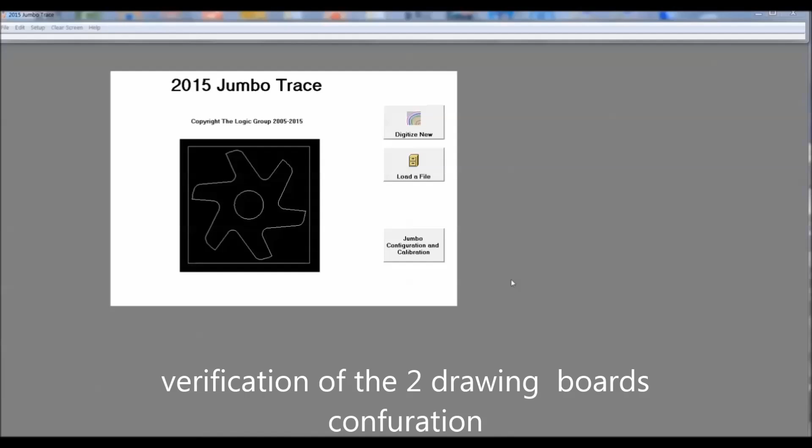Before I start any tracing, I like to verify that my two boards are working correctly with the computer. Go to Setup and Configure and follow the instructions. What you're going to end up doing here is touching the pen on table 1 and verifying that table works, and touching the pen on table 2 and verify that that table is working correctly. This also shows that the ports are working correctly. Now that everything checks out, you're ready to digitize.

I want to show the two reference points. They're the red X's on the diagram on the left, the red X on the diagram on the right. Before you draw, the program will ask you to input the two reference points, the one on the left and the one on the right. These reference points are important because that enables you to move the diagram and get the alignment. I'm just showing here the different selections that I use for drawing.

I draw each separate part and I complete it. As each part is completed, the software will close up that part so there's no open vectors. Again, I always talk about saving my work. I save my work frequently. In case I have a bit of a problem, I can always go back to the copy that was perfect.

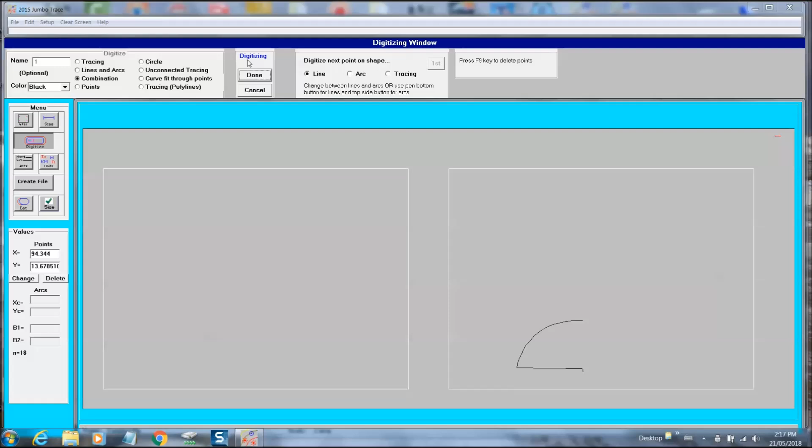I seem to use the combination selection a lot. It just feels comfortable. When I make up these videos, I also speed them up because it would take forever to show some of the drawing. I just take my time and do each section, close it up, make sure there's no open vectors. And again, save my work frequently.

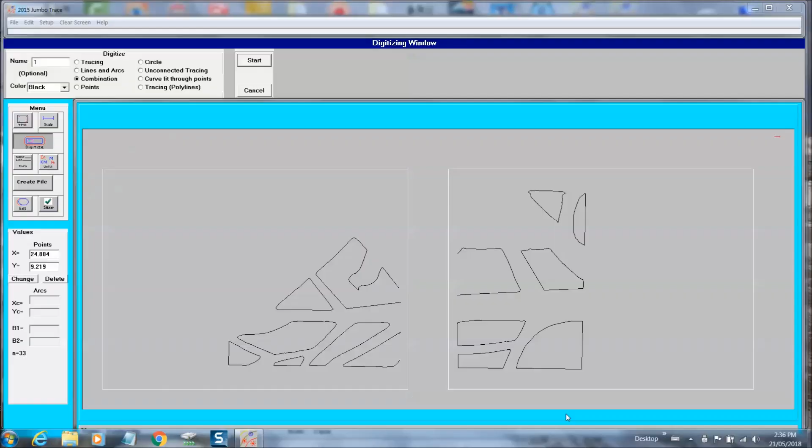So you'll notice here you can see that joint between the two boards where the drawing is not picking up. That's why we have to move the diagram using new reference points to be able to draw that area in that joint between the two boards. Again, that area that I've penciled off with the red marks, that's the joint area that I'm redrawing.

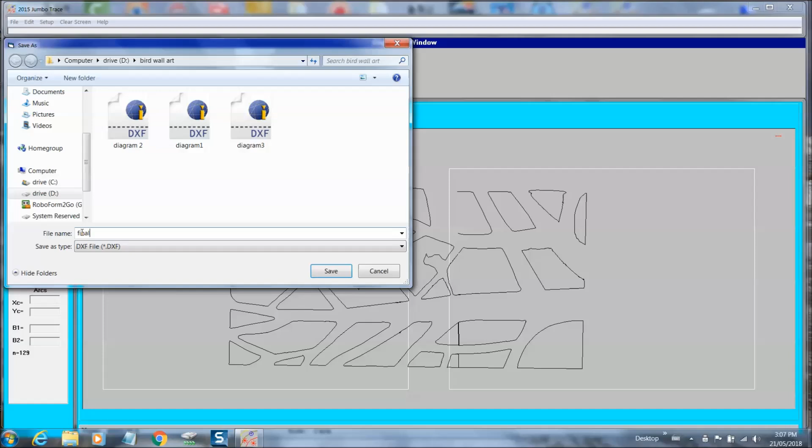After you move your diagram to the new reference spots, there's a procedure to follow to draw in this joint area. There may be some node editing required when you draw in that joint area, especially joining up the diagram. Now that we're complete, let's save the file as the final.

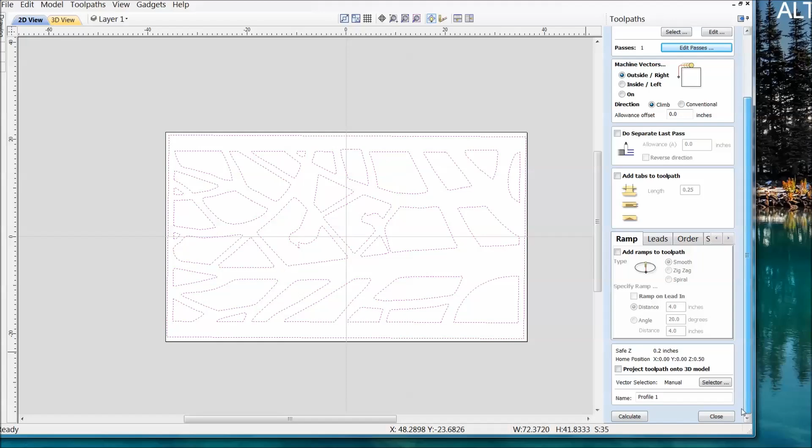I take the file that we created and I load it into Vectric Aspire 9.0. This program checks for open vectors, allows some node editing, and creates a toolpath. I also like to run it through the simulator to simulate how it's going to look, spin it around, orientate it the right way, even make it look like it's a piece of wood. The file looks good, it's ready to have a toolpath and ready to be cut.

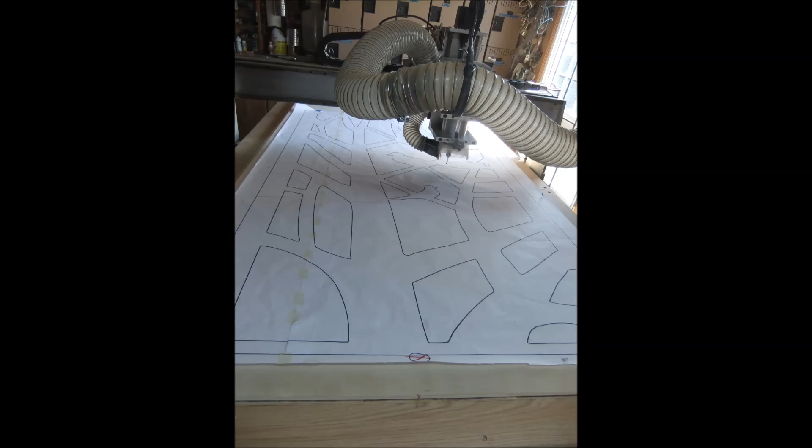I tried something different this time. I put the full-size plans on the 1/2-inch plywood that I'm cutting. This sort of enabled me to see how the cut would look on the sheet.

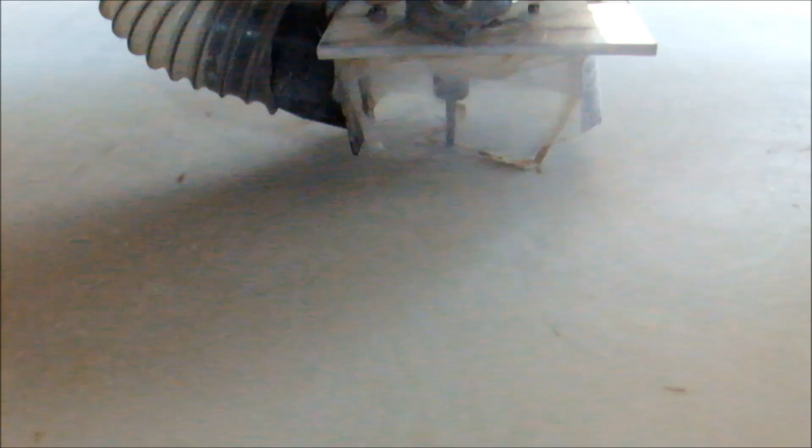I'm using a 1/4-inch end mill, about 21,000 RPM, and I'm using a feed rate of about 100 inches per minute. And you have to realize here that the video is sped up a lot because I want to get the information in here. The material here is 1/2-inch birch plywood, 4x8. The full cut took about an hour and 20 minutes.

I have the workpiece fastened down to a 1/4-inch piece of scrap plywood that's still on top of my slave table. I used 1¼ nails, finishing nails, to fasten my workpiece down through the scrap plywood. Each part that was cut out was tabbed, so as I was going along I took a chisel, removed the tabs, and pulled the piece out.

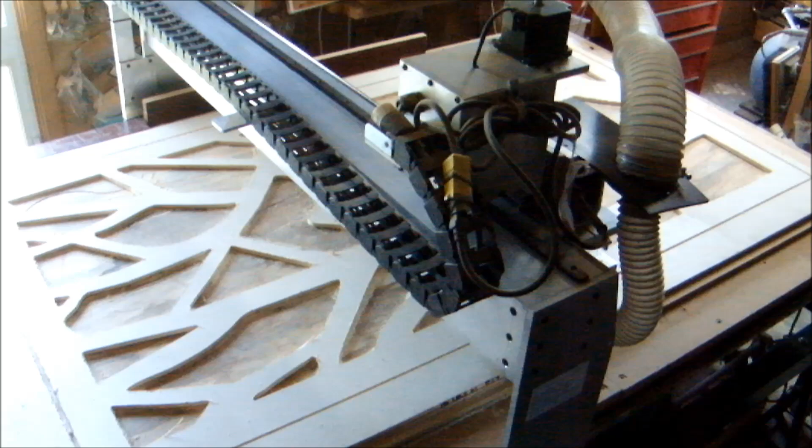The job went well, everything went pretty smooth, parts came out easy, and the finished product looks excellent. This would be a fine piece of wall art to hang on a brick wall or in a garden area. So you can see here we went from digitizing a plan to cutting it out.